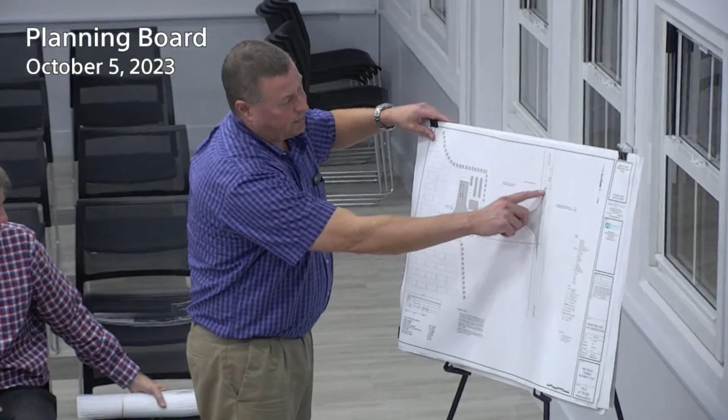Do you want me to move this? No, does everybody see it? Yeah. So the main thing we've done is widen the access way here to accommodate the fire trucks turning, both coming south and coming north, so that part of the fire truck doesn't cross the center line of North Street. That was one of the requirements he wanted us to look at.

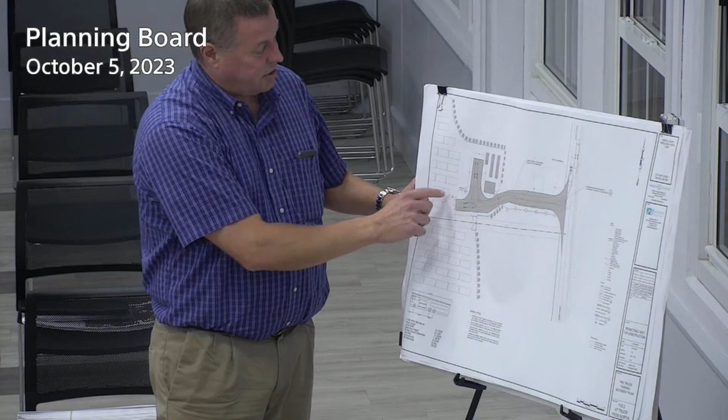So we've completed these. The other thing he wanted was a barrier at the end of the access road so the ladder that sticks out off the front of the fire truck wouldn't swing and potentially hit any panels. So we added bollards here, and we removed some of the tables, so it's a 15-foot minimum setback from the end of the road to the panels. Essentially, the edits we've made since the last hearing a couple weeks ago were to accommodate the fire chief's request.

I have a bunch of stuff. I'll go to the most recent from Paul Barry, Fire Chief, at 5:10 today. It says, 'Good morning, thank you for getting back to us. Unfortunately, analysis shows access that does not comply with CMR 5271.' Is that what you're saying it does?

Yeah, so this is what we finished today. It is today, but he hasn't said yes or no, right? We sent it back to him. We did not hear back. I know Dan tried to call him a couple times this afternoon too. All right, so we don't have the A-OK from the fire chief, right?

And the next one, he has concerns about proximity of the panels to the end of the new access road and proper protection, which I think is what you just indicated. You're putting bollards there. He wanted us to advise the minimum vertical clearance of the panels and the distance between the panels and the access road, while ensuring that the overhang of the bucket tower is protected when turning, even though we're not driving under it.

Right now you've answered what he had, but we don't have his reply, okay? Right. All right, well I think we're gonna have to wait for that. Can you get it by next time? I hope so, we've called him, we've emailed him, we can't force him to respond. He's been pretty responsive when we send him stuff, so we're hopeful. It seems like you're just down to these three items you're showing in the corrected plans, and now it's just the deputy fire chief, Paul Barry, who needs to give the A-OK.

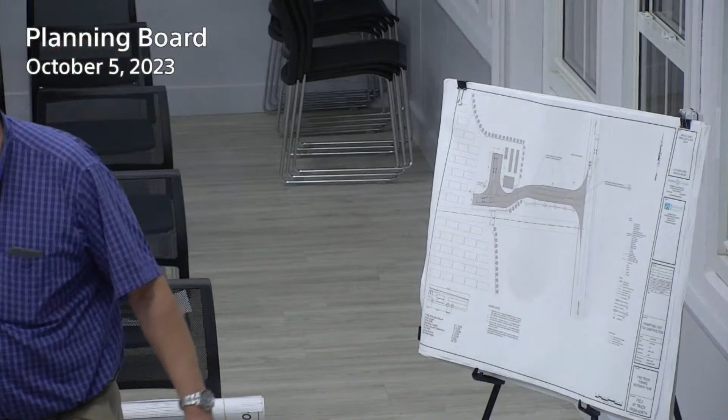So it sounds like you just want to touch base with them so they can come back and confirm it's all set. Yeah, you already show it anyway, right? We included that in the response to comments too. I'm sure you can go down and see, might have to come to the fire chief and bless it, because we did talk about when you can't put anything on the easement. We've modified that.

Is it possible to get a copy of that letter sent to us? Yeah, this was sent to us. Yeah, we can give you a copy.

Did that come to you, Kate? Kate will email it to you. Okay, if that's all, great, thank you.

I think, Phil, did you have anything? No, nothing additional. Kate? Nope. And Paul? All clear. All right, so if you could just wrap those two up, we can put you on for next time, Kate. Yeah, it's October 19th, we'll do 7:05. 7:05, you'll be the first one on. Perfect. It would be better if we get the letters ahead of time. We'll push. Yeah, okay, it sounds like he missed something, but he's also running a little short-handed.

Have we received that plan? Yeah. That one, I haven't seen. Are you adding anything to it? No, this was just done today. I can leave these if you want.

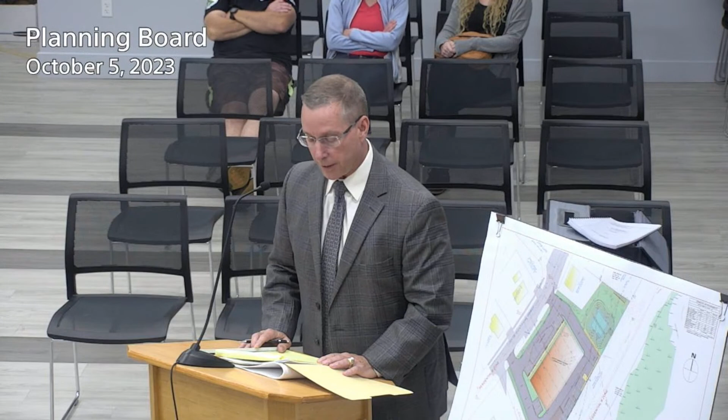Which is located at 120, 126 South Street. It's two parcels of land that contain a single-family house at 126 South Street, and the other building is about a 13,400 square foot commercial building. It's in significant disrepair.

The property is located - if you look at the site plan, this is Lamplighter Lane over here on the other side of the street. So this is on the east side of the road. It backs up against the rail trail, the town rail trail. The Neponset River is to the right as you're looking at the drawing, and then it loops around to the left outside of our vision here.

So the topography of the site is relatively flat along the front of the building, along South Street. It's about 182 elevation. Then if you're standing there looking up, you can see how it rises toward the buildings, and the house sits relatively high too - about a 5 or 6 foot rise in that area, then it drops back down in the back. So the elevation of South Street and the elevation of the rail trail in the back are almost identical, within a foot of each other.

So it's kind of odd when you look at it - it comes up, but then if you go down in the back, you can see it comes out. That was probably all added when they constructed those two buildings. The Neponset River is to the right and top as you're looking at the drawing, to the east and north. You can see in that light green area, bordering vegetated wetlands that are part of it. We've been before the Conservation Commission, and they didn't close the hearing yet.

We'll be going back to see them again in November.

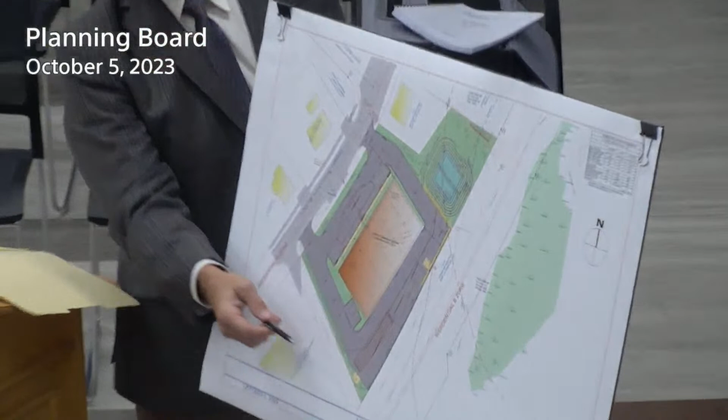It's worth noting, if you look at the plan, you can see the gray shaded area - it's hard to see - and there's a Jersey barrier wall back here. So if you went back there, you might think the Jersey barrier wall is the property line, but it's not. The property line is almost at the rear of the building, so this activity will be significantly farther away, probably close to 30 feet farther than that.

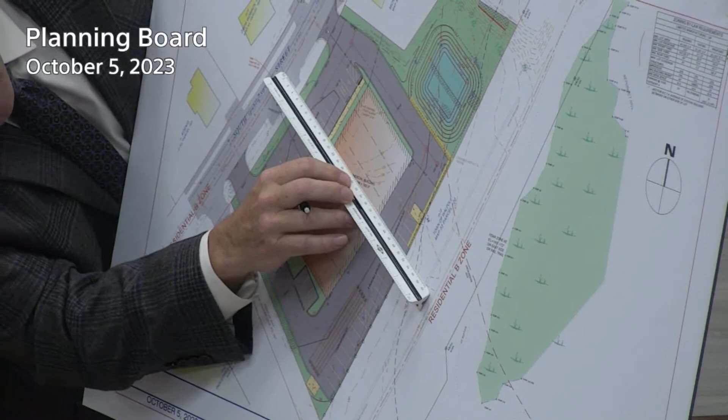That's 30 feet. If you took a walk back there, you'd see the Jersey barriers. What we're proposing, staying on our property, is 30 feet closer to the building. That area will go back to normal after it's cleaned up. We're not doing anything with the Jersey barrier because those aren't on our property—those are on the town's property. I believe the town put them up, though I'm not certain.

Along the rear there will be a 6-foot-high fence. We have a lighting plan, sheet LT1, if you take a look at it. All the lights will be on the building—there'll be lights over each of the garage doors in back, about 6 of them. There'll be several lights on each side of the building to light the driveway, and lighting in the front as well. The lights will be anywhere from 6 to 15 feet above the ground: above the doors, 10 feet on the sides, and 15 feet in the rear to clear the garage doors. Looking at the photometric plan, we have LED lighting that's dark sky compliant, with no wash or illumination off the property—no lumens off the property.

We did significant work on this. Right now there's no stormwater management on the site—everything that hits the site just runs off, toward South Street, back toward the rail trail, or off to the north, which has a significant drop-off from the site. So we went out and did soil testing, witnessed by the town engineer, and discussed how we'd handle stormwater management. Because the soils in that area are good, we came up with a system that has two major components.

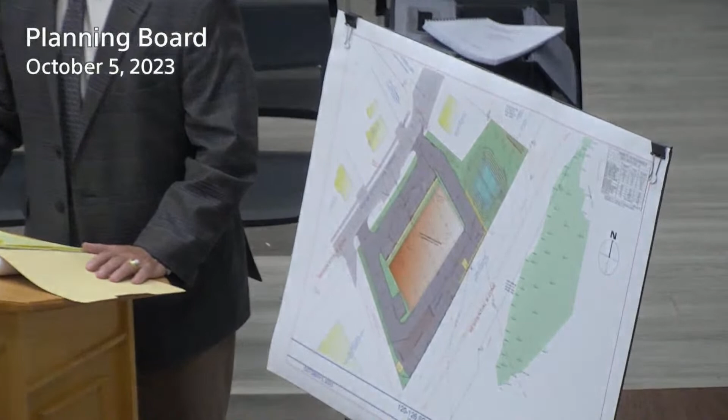The first is down here in the southeast corner—an underground drainage system. We're going to capture all the roof runoff and channel it into that. It's considered clean because it's not a metal roof, not a flat metal roof, and doesn't touch any pavement. So we'll separate that runoff and put it into the ground in that area, which is also considered a low-impact development element.

The other piece is an above-ground basin located on the north side of the building. That area will capture runoff from the parking lot through a regular catch basin, manhole, and pipe system. Just before it enters the basin, it will pass through a water quality structure that further cleans it, removing total suspended solids and total phosphorus, and then infiltrate into the basin. Both basins are designed to capture and infiltrate up to the 100-year storm, the 1% event storm, so there should be no runoff from either one.

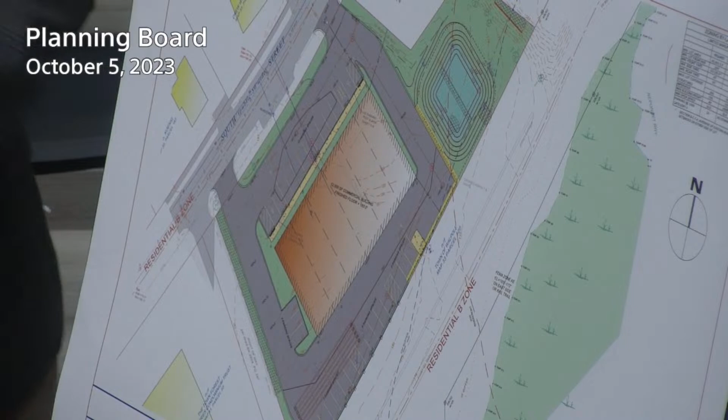There is some runoff from the site, from an area that's going in a direction we're not capturing. But right now, most of that area is paved or gravel. We'll be taking that area—maybe half paved and gravel—and grassing it, so there will be less runoff going there. This meets the town standards for clean water and total suspended solids, meets the standards for rate of runoff, and meets the standards for volume of runoff.

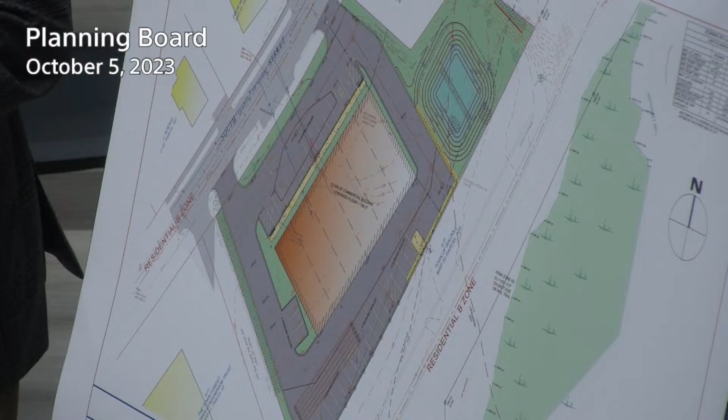And I think I'll stop right there, Mr. Chairman. Okay, all right, I'll read what I have.

From the Board of Health, dated 9/20/23: they voted unanimously that they have no concerns. However, they recommend recycling be provided for tenants in order to comply with the Massachusetts waste ban.

From the police, Officer Luke Pollan, dated September 4th—they don't like the new neighbors. Yeah, that's right, I received that tonight. They don't see any concern. I would hope not. I'm sorry, what? I just received that tonight at 5 o'clock. Oh, from Officer Pollan, okay.

Sewer and water, they do not have any comments at this time. Well, we don't wait for them, I don't know what their comments would be, but you're going to be on both water and sewer, so show the hookups.

Let's see if I have anything else. No, the last one I got is Kyle. You want to do yours?

Mr. Chair, thank you. I delivered a memorandum to the board dated September 26, 2023. There were 23 comments on there. I listened to Mr. Buckley's presentation, agree with what he said, particularly his recap of the drainage. The planning board memo doesn't contain drainage comments. We reviewed for the Concom first, and they have the drainage comments. There are some, but I agree with the summary.

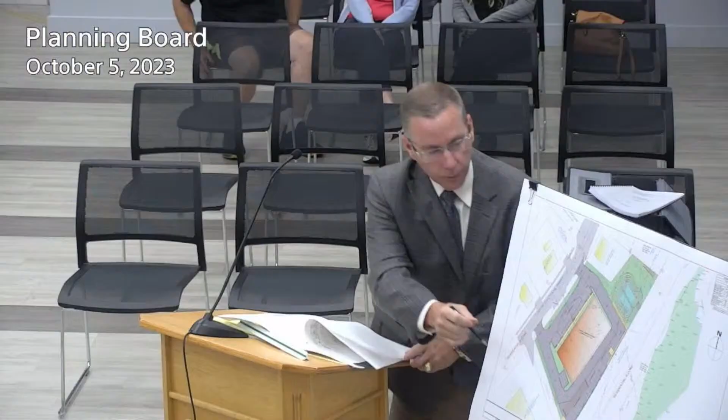The back corner is going to be a retaining wall, is that correct? Yes. Okay, what is the height of that? If you go to sheet 3.0, at the corner there, it's 7 feet high. Then it goes down to 6, and then over here it dives down to 0. That's because that's where the drop-off begins to slope down, okay.

And the snow storage areas, could you indicate that on the map so it's clear? If you go to sheet 6.1, I'll show you - we're showing snow storage along the front here, along the side here, and that's it. Okay, so that's in that area. Because what we're doing is this is a slope, it's a pretty steep slope here, dumpster here, so we'll just need to relook at that based on Kyle's comments.

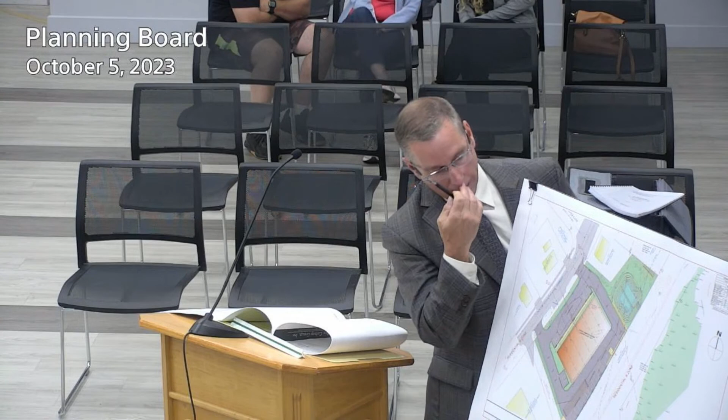I was looking at that one, and I saw the square feet and then the cubic feet, and the one out towards the South Street side, the numbers didn't seem to be in agreement. You'd think from square feet to cubic feet you're multiplying by 3, and that doesn't seem to be the case. So on the front, a square foot is the area that we're using, and then we pile it up at a 1-to-1 slope. So it's not just a rectangle - you have to calculate the area of that. So it isn't just 3 feet high? No, it's not just that. So it piled up higher in the middle? Yeah, there's a slope to it, and then it slopes down.

I'll note that that's a first - we've rarely seen a calculation on snow storage volume. What do we base it on? I got that from Canada. Some consultant asked me about it once, so I went online, and some Canadian smart consultant had that information, so I copied it.

On the snow storage on the north side, between that and the neighboring building, is there a dividing wall of any sort in between the two properties? There's a fence. Okay, so the snow will pile up against the fence, it won't fall into the other person's property, okay.

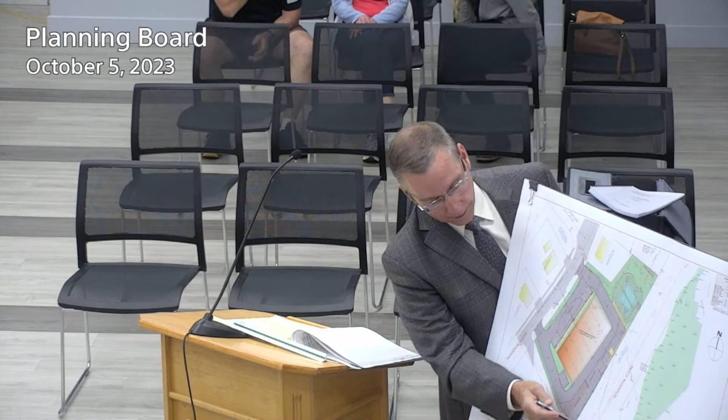Good point. It will definitely go through that fence, it's your basic 6-foot vinyl fence. But like I pointed out earlier, if you go back there, if you look at your plans, I know it's hard to see, there are Jersey barriers all along here. I don't know who put them in, but it will hit the Jersey barriers before it gets to the rail trail. I don't know if the current owner put them up, or if the town put them up, but we have no plans on taking them out.

Okay. All right, yeah, no other questions, Jack.

I think the town put them up because the crap was starting to get closer there by the rail trail, and they used that area for their little ATVs to go up and down, so I guess it was the town. I don't think the owners put that up.

Now, I mentioned you gotta start with the fire chief on that stuff. You answered the question I had about the snow dump.

Now, the one thing, my questions on the handicap spaces in the front - you got them at the two ends. How does that help the middle though? Won't you run into a problem or not? It's based on the number of spaces, based on the number of parking spots. I understand that, but if this was a building, and I went through it, being on the library, being on the building, you gotta put them as close to where you're going in. Now if you only had one door this side, one door that side, I'd say fine, but if someone's in the middle, now what do you do?

I suppose you could put - I've seen it - both the spaces in the middle, so you could have the spot and two spaces.

Before you finalize, go down and see the building commissioner, Mr. Crowley, and ask him what he thinks. Because you're doing it in base, which I don't have an issue with, but it's just like anything else - the handicap space is supposed to be the closest to the door. Well, given you've got 6 doors, you're close to each end, but not the middle. So it may be just like you said, you split it in thirds. So you want to find that out before you do your final plan.

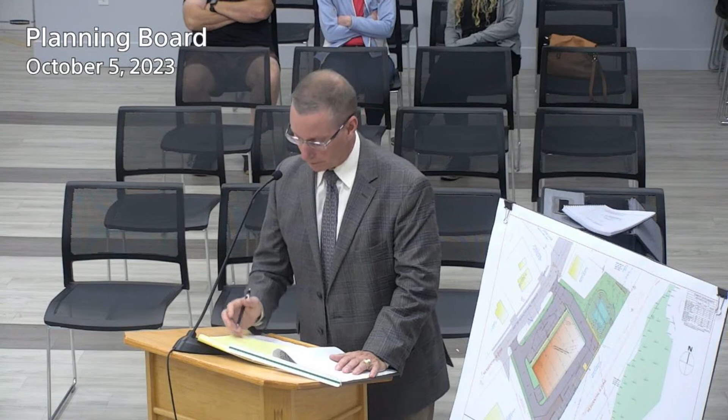Another question - I know Katie talked about what's in the ground. How about the building itself? I don't know, I'll find out. I imagine they probably did an assessment, but I'll find out. I mean, that doesn't come under us, but since we're the only public hearing for this, I think the neighbors want to know if there's anything and what it is.

My understanding is before you get a demo permit, you'd have to show the thing is clean. And that would go through the building department, so I just want to bring it up to everybody here so they understand that you're not just coming in and knocking it over one day and poof. Right, because I know the building's pretty old and stuff.

Based upon what's there now, you could have grown weeds on that site and it still looked better. Did you say weeds or weed? Weeds - well, you could grow real weed and sell it, but the snow dump, you answered that, I always wondered why you couldn't.

And that was all I had for the moment. Oh, a simple one, because everybody's looking at the colors - I assume your PDF has colors? Yes. Do we have one, Kate? A PDF of this, the colored one - we can send that to you. Yeah, if you would, makes it easier for us to look at too, and see all the distinguishing features.

The other thing - everybody's going through the front, through the doors, and the back is the garages, okay? That's why I was questioning about the handicap spaces. That's all I have for the moment.

I'll open it up to anybody from the audience if they want to come up to the podium, tell us your name and any questions, and we'll see who can answer for them. Sure, okay.

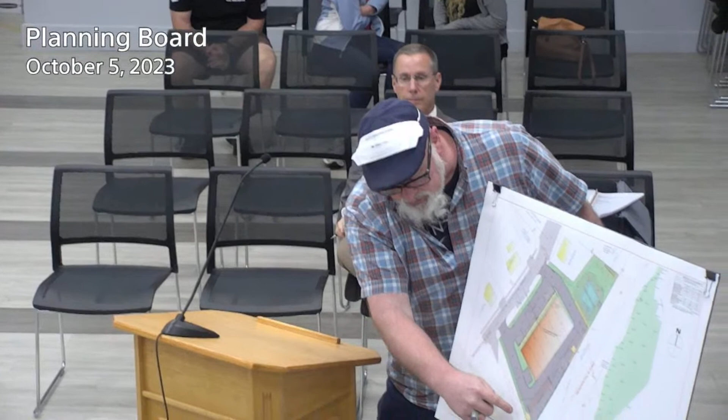I'm Drew Womack, 113 South Street. This is me here, that's my swimming pool. That's me. This over here, the right-of-way you guys were talking about, is the right-of-way to the town forest to get to the trails and stuff like that. My property is over here. In its current state, it's a terrible eyesore, if you've ever been by it.

Anything would be an improvement. Just a flat piece of brown would be an improvement. A daisy field would be an improvement. Anything that just cleans it up would be fantastic.

Let's see, I forgot all the questions I was going to ask a second ago. As far as the use, is there going to be a change of use on the property? Because currently on South Street we have a home, this I believe is light industrial right here, and then this is another home. So you have housing, light industrial, and then housing - it skips: housing, light industrial, housing, light industrial.

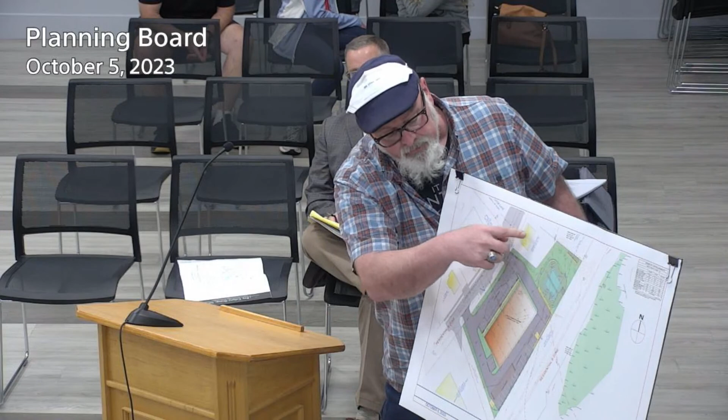This right here is the other light industrial area. So now we have a change where we go from housing to light industrials. Is it going to stay light industrial, and would there be any change or restrictions as far as the time when business is done there?

It's going to operate like any other business there. It's zoned for limited manufacturing, so they're limited to what everyone else has to do, like that one, and even the new one across from Heinz's, the landscaper. Yep, just like that, they'll operate the same.

But it looks like the house on the right is being torn down. Yeah, that's true. So the zoning would change from... Whatever, the zone won't change. The zoning stays, you'd have to do a zoning change, but what's allowed there will stay. I believe that house might be in limited manufacturing, I'm not sure, but that's what it looks like. So nothing changes, what they're trying to do is what's already allowed there.

Would there be any idea of them trying to sell cars and vehicles out? Because that's what this has turned into, a little sales yard for trucks, vans, snowplows, storage, and garbage, all in the back. Well, that's a whole other thing, you'd go talk to the Tuesday night crew, but any sale or resale of cars has to go through the selectmen, they have to give them a permit.

So if they're doing that now, they're in violation of zoning, and it's up to the building inspector. It's like anything, anybody could start selling anything, but if they can't do it, you have to report them, that's all. As far as the sign, was the signage on the building itself or out front along the street side?

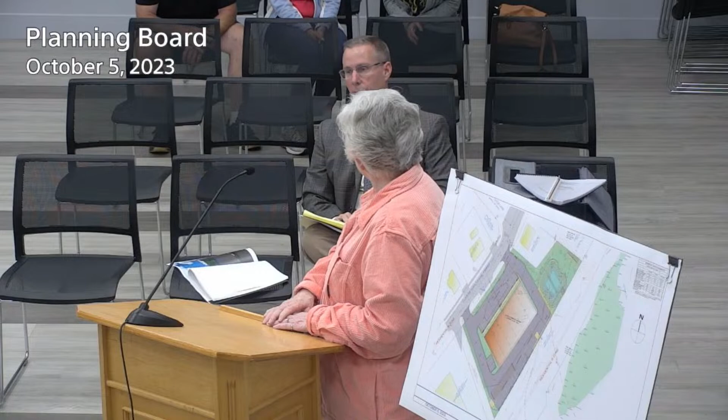I was on the board - I'd make it a condition, because if you've been in the back of it, and I think only since the trail has been in existence can people now see the back of that building. It's been deplorable for years - toilets, tubs, and everything has been dumped there from previous contractors. There's also been automotive stuff. They had 10 or 15 trucks parked there, as you may know, for decades in the front of the building.

My safety concern is, living where I live, I back into my driveway to come out facing the traffic. I don't know what restrictions you can or cannot put in, but I think it would be safer if you had one way going in and one way exiting, rather than having them go in and exit the same way. The traffic on that street is too busy, and even with Lamplighter across the street, there are almost accidents there all the time. There's a clear view, so I think for a new business coming in, restricting it to one way in and one way out, in the long run, is going to be safer. I don't know if that's a restriction you can or would want to put in, but having lived there as long as I have, I cannot back out of my driveway at almost any given time between all the trucks and cars on that road.

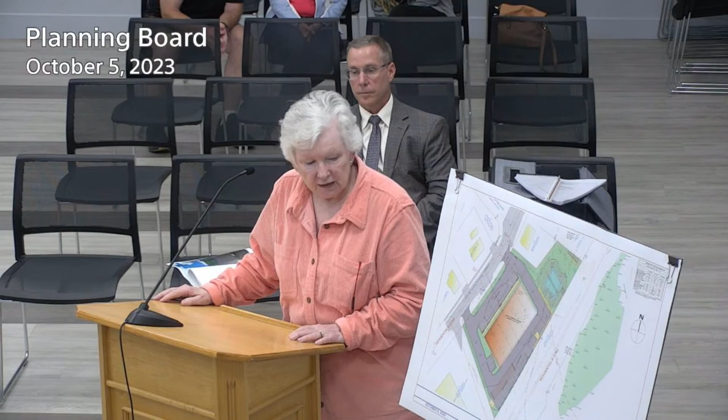Something you may not be thinking of, but as somebody who lives there, it is a concern. The more young drivers we have up the street flying down, despite the sign now telling them the speed limit, you can hear them jam the brakes on at the end of South Street coming onto Common. So the long and short of it, I think it'll be a vast improvement. I agree with all of you, it'll be a vast improvement, and I'm looking forward to it being done, but I want it to be done to the best that it can be, by what we have for rules and regulations now, because they've been so abused previously.

Alright, a couple questions - did you ask for a waiver from the traffic study? Yes. So the way I look at it, we have someone here saying it's a lot of traffic. So either do a traffic study, and if it shows you can do in and out, fine; if not, you might have to consider one way. That would be an option.

Do you understand what I'm saying, Josette? So they can prove it one way or another. Yeah, either or. The other thing is dealings with the Concom. I know you're familiar with the way we do things - we don't close the hearing before they're done with Concom; if they want to, it's their risk, but if we close it and the plan changes, he's got to come back. So typically, we wait for their comments, and I think they're going to have to wait to see what they're doing, if anything is going to move.

So I have a feeling we're the last ones in the parade, would you say? You have to go before conservation again? We're going to ask tonight for the board to continue this to November 2nd. And then I think we're meeting with Concom November 8th. But in theory, you wouldn't want to close until you close with them. So we're just at the end of it, and any changes they want, he's going to have to put on his plan and then give it to us. I think he understands if he closes it with us and there's a change, he starts the process all over again - we don't really want that. Just do it right the first time.

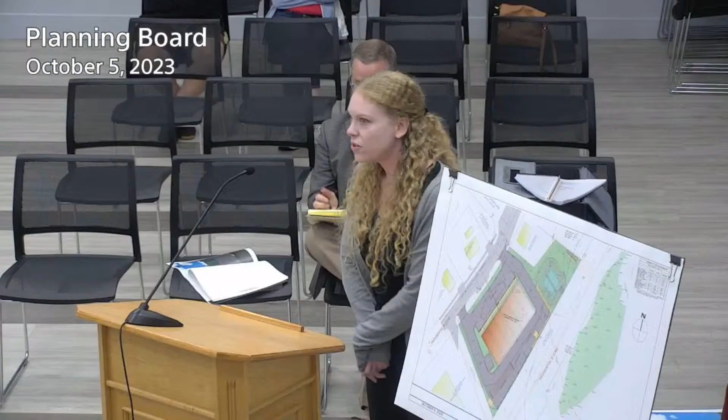Thank you. The other question I had was maybe not answerable, but South Street is a busy street. Despite that property currently being abandoned, there's a home there with a very sweet, very quiet family, in my experience. So this definitely will change the neighborhood from a busyness side of things.

While there is that industrial building across the street from my house, they are fairly quiet and work very standard business hours. They do start a little earlier in the morning than normal, but they're quiet by about 5. So I did just want to voice a potential concern about the hours that the building would be open for.

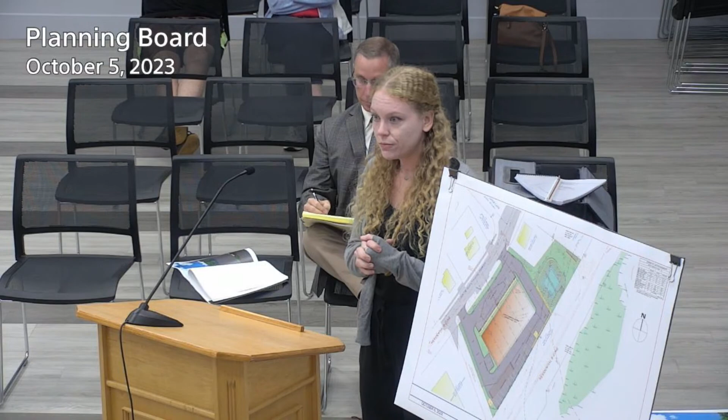The hours are set by the town. We already have standards that every business has to abide by. If they wanted something different, they'd have to come in front of the selectmen and explain why, but they are set. So what can be done here is what can be done next door, but they can't do anything more than what the town currently allows. Okay, thank you very much for your time. Thank you.

Anyone else? No? All right, one more comment I'd like to make.

On the lighting plan, page LT1, if you could put a little chart showing the number of different types of lights you're going to be using, the wall mounts or any freestanding ones, on that page somewhere. If you look on the plan sheet on the building, it shows we say typical of 2 or whatever the number is, but I can create a chart, yes. Thank you.

I just want to make a statement regarding build-out. Even if they had the height, they have to conform to our parking, because you go by the number of square feet, so that would up the square feet. The more they put there, the more parking, and they don't have enough. So that would limit them too, but typically it's just that long and narrow bay, whoever wants to go in there.

I don't have anything. You all set? All right, so just to summarize, you talked to the deputy, or I guess it's fire chief Barry now, you have to get that straight, and then whatever conservation and what you guys want to do, whether a traffic study or just in and out, whatever way you want to do it, and whatever else the other minor things.